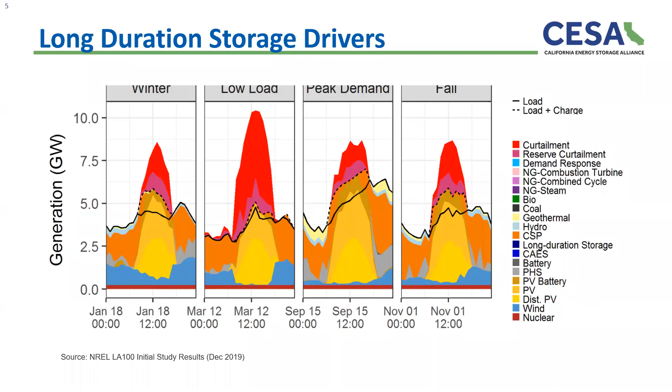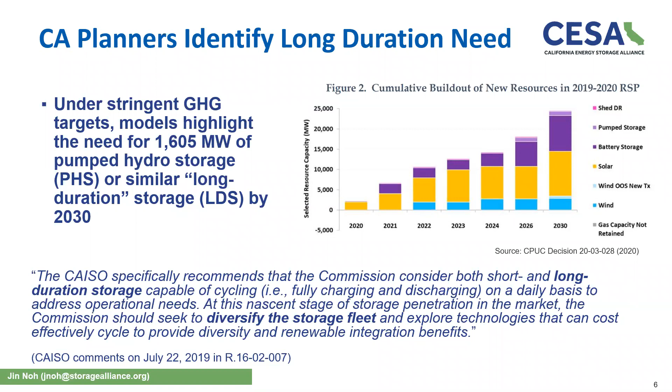We're going to advance further to identify specific technologies and characteristics of different long duration technologies that could better be reflected in these models, given long duration storage is a broad asset subclass of the storage industry. Long duration storage is really entering the conversation of the ISO and grid planners, who have explicitly stated in public comments that they recognize the storage industry needs to evolve, transform, and diversify the storage fleet to better achieve our long-term decarbonization objectives. Malta is one of those leading companies pioneering a long duration technology, so I'm happy to kick it off to Ty.

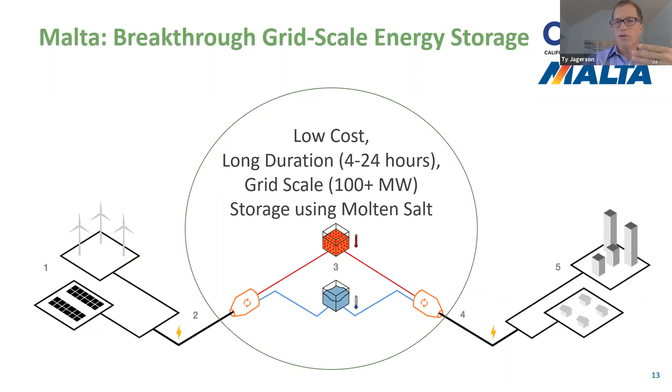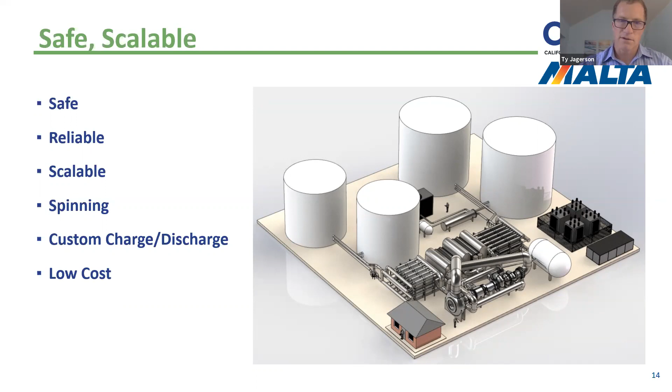Our plant looks a lot like a thermal plant. It looks a lot like a gas peaker plant. And a lot of the technology we use is familiar to people that operate conventional power plants. There's a couple reasons this is relevant. One is because the technology was designed to take advantage of mature, established technologies. And when we talk about coal a little bit later, we'll talk about how that actually gives us a nice way to support the transition of an ailing industry, and it plays into our market engagement. But the technology is designed to be safe, scalable, reliable, able to be designed in a custom way for different geographies and to be operated in creative ways that we think reflects the requirements of the grid coming forward. And of course, it has to be low cost and deliver good returns for investors.

Malta is a spin out from Google X, and that continues to be a really important relationship for us, both for on the energy consumption side and as a data friend. We also have Alfa Laval, the world's largest heat exchanger company in the world, as a participant in the company, and Breakthrough Energy Ventures, and other strong partners, including Concord New Energy, which is an energy developer, and Turbo Machinery Partners. So we are designed to scale. We're engaged in the market, and we have partners that are investing a lot alongside us into getting this capacity into the ground.

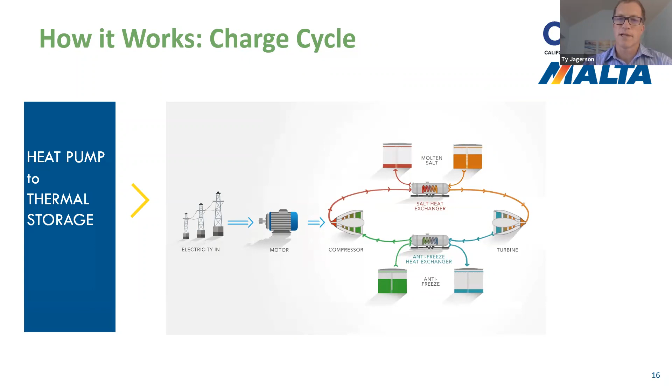I won't take too long on this. Basically, we take energy from the grid, we run it through turbo machinery, put it in tanks, and regenerate it again.

So there's a handful of dynamics that are driving the expansion of the storage industry and the emergence of this long duration energy storage component of that industry. And the first one is the accelerating renewables penetration, more wind, more solar. We'll talk about why that's happening and our perspective on why people generally don't think it's happening as fast as it is happening. Second thing is climate concerns. We all have this, and it impacts the policy, and it impacts people's daily decisions, and obviously it drives a lot of the stuff we're talking about here. Something a lot of people are unfamiliar with is just economic growth and electrification themselves are drivers of storage and long duration energy storage requirements.

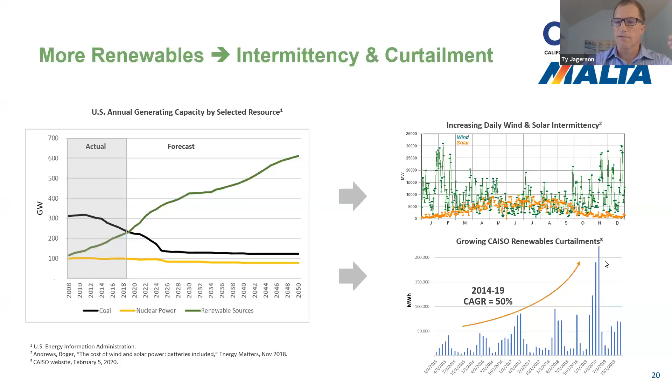The other thing that's really interesting is an example from the California energy market, the CAISO market - curtailment is going up. Curtailment is just a fancy word for throwing away useless renewable energy that you can't use at the time it's generated. This is a recent chart that illustrates how much curtailment there is, and it's very much an exponential line. You're going to see increasing amounts of this, not just in California, but in all parts of the world. If you look at this illustration for CAISO and the renewable energy penetration levels that are anticipated, you see a very steep increase in the anticipated penetration percentage of renewables.

But here's the challenge: the amount of renewable energy storage you need, as your overall contribution goes up, increases non-linearly. So this type of increase has to be met by a greater increase in amount of renewables storage, because you need to be able to cover more and more different scenarios for volatile situations.

One of the things people often say when we're talking to them in the market is, I totally get that we're going to need long duration storage at some point, but it kind of seems like it's not really there yet - shouldn't we just wait? This is an interesting analysis done by NREL for a bunch of different energy markets and specific locations in the US.

Their assertion is that the blue line is the amount of 4-hour storage that's needed, the orange is 6-hour storage, and the green is 8-hour storage. That's what's needed now and for current planning cycles. The critical thing here is that you don't see a lot of 8-hour, 10-hour, 12, 20-hour storage out there, because those technologies really aren't available yet.

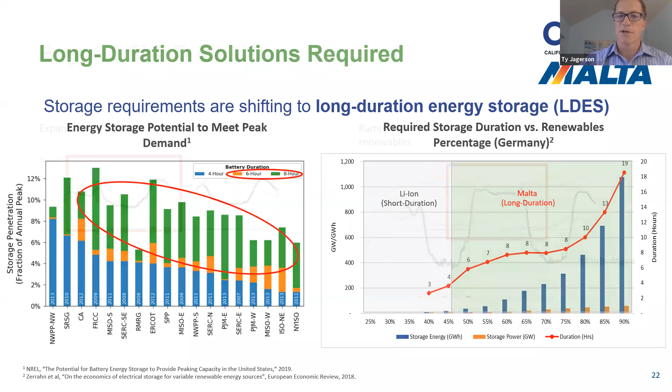So lithium is a great solution for dealing with the immediate problem of the duck curve, where you can take some of this energy from the middle of the day and shift it towards the end of the day, and then you sort of flatten the duck curve.

And we think lithium is a great solution for that. As you get more and more lithium on the table in the grid, it flattens out a little bit, but then you have the challenge: how do you extend that renewable energy to supply all through the day, into the next day, and eventually into subsequent days?

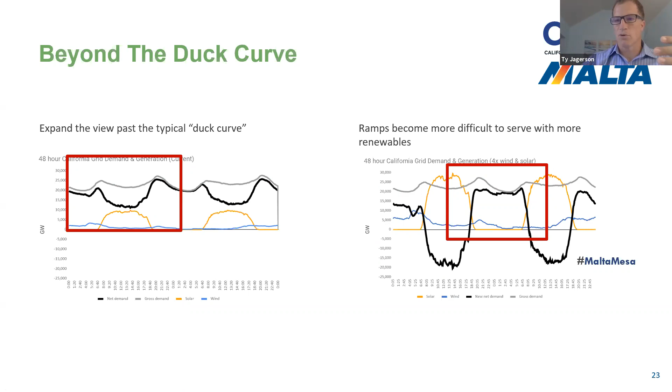That's really the initial applications we're going for. We're not only looking at shifting it from the middle of the day to the end of the day, but shifting it all the way through the end of the evening. Because we have this flexible charge and discharge ratio, we can pull down extra amounts of really cheap energy in the middle of the day and then spread that out over longer periods of time to help make the total grid much more flexible and resilient in the face of enormous amounts of renewables.

There's a lot of complicated ways to look at this, but one simple illustration is: if you can spend more time charging and get a longer charge cycle, that gives you a lot of flexibility for how you dispatch. You can do that on the charge cycle or the discharge cycle. We'll talk a little more about the revenue models associated with this.

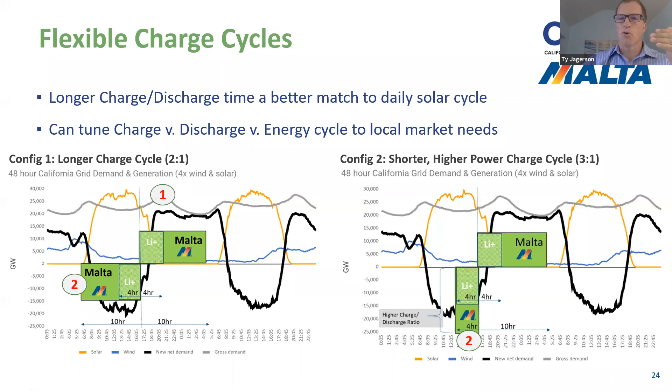There are really a couple different time scales that are relevant. You've got the duck curve alleviation, and then you've got moving into a 2-day regime where you can extend into a full 24-hour cycle. And then increasingly what people need to be able to do is run their grids without any carbon supply for multiple days.

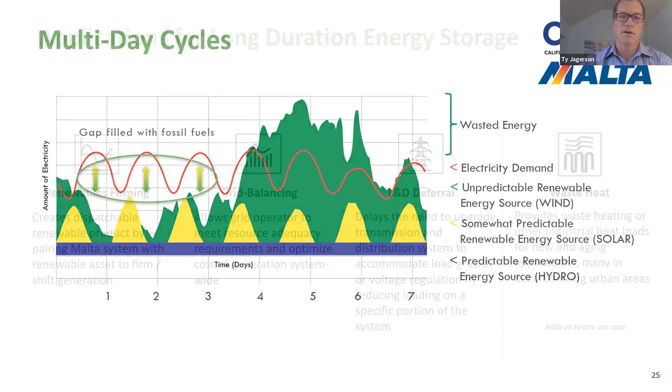So this is really where, for these initial applications we're talking about, and then as you get into multiple weeks and into months, you start moving into the domain of seasonal storage, which is not really what we're going after. Although if you had a 96-hour long duration energy solution, that might help you combine your resources to get to a seasonal solution. But there are other interesting developments out there, like hydrogen might be a good seasonal solution. And again, all these things complement each other as part of a future grid ecosystem.

There's a lot of different ways to look at the value of a regular storage system or a long duration storage system. The simplest way to think of it is in terms of renewables firming, balancing out your renewables, grid balancing, which is accommodating for all the different chaotic elements on the grid and stabilizing it, and then T&D deferral, which means instead of spending a billion dollars on a new transmission line as you get new loads and new solar, you can use storage at either end of the potential transmission or distribution line and just buffer your energy that way.

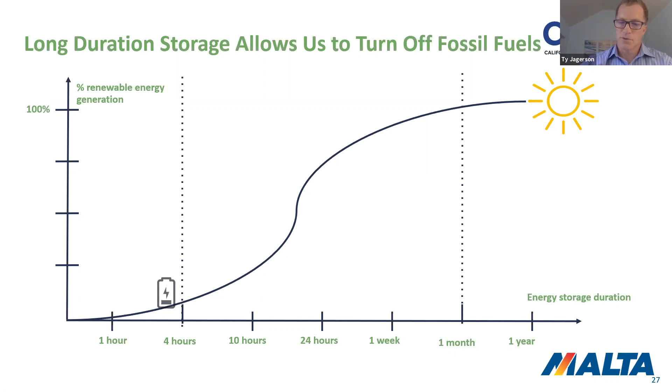In our case, we also generate waste heat, and we have a thermal supply in our system, so we can also go after waste heat applications. But again, the key thing that all these applications are really enabling at the high level is being able to get to a point where we can turn off fossil fuels altogether and get to a truly 100% renewable energy solution.

So this is sort of a standard 'mandatory required market is growing aggressively in all markets around the world' slide. And it's useful, but something that's always fascinating to me is when you look at these slides, they always start with some sort of exponential curve, and then when you look out into the future, they project out linearly. For a number of reasons, I think a lot of the models out there are

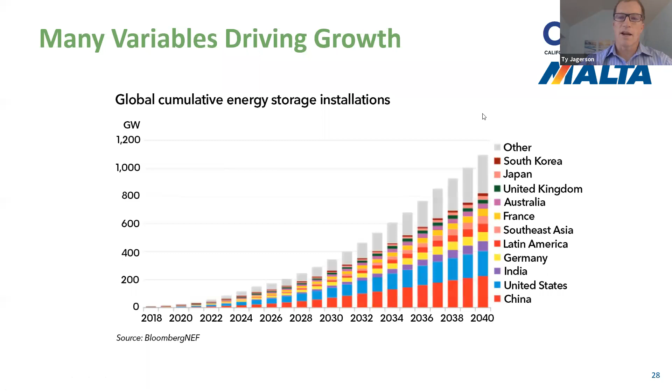wrong and overly conservative. So I'm going to pause here and take a couple of questions.

So first question: did Mr. Jagerson cut his own hair? That's very funny, anonymous. I did, I cut it initially. My wife helped me finish the job.

Gravity versus thermal, locationally and application-wise: I think there are potentially applications for gravity types of storage solutions. Pumped hydro is a gravity storage system. And I think there's sort of a Cambrian explosion of new technologies out there. I think for gravity, it's hard to beat water, but there are a bunch of creative things going on with pressurized water and everything else.

Is thermal more scalable down to distribution level for microgrids? One of the advantages of our technology is that the bigger it goes, the more economic it gets. So we've migrated our core product to a 100 megawatt solution, because turbo machinery has demonstrated that it's the most reliable, lowest cost, large scale way to generate power. So we think the 100 megawatt domain is the most interesting. We are looking at some thermal applications and some niche applications down in the 10 megawatt range, so yes, especially when you're combining the power with the thermal loads, it's very interesting.

There are political organizations out there that are looking ahead and saying, we need this, we need it now. If you dig into the weeds around a lot of the regulatory bodies who are saying our 4-hour RA requirements or our capacity requirements, market mechanisms are inadequate for the coming boom in renewables, and inadequate for the political commitments being made, or the corporate commitments being made about 100% renewables.

And so these changes are in the works today. And 3 years from now, 4 years from now, certainly 5 years from now, when we turn on our first system, the regulatory mechanisms through which storage projects are compensated today will be very different. And you can start to see where these are going when you dig into some of the regulatory dialogue.

California, again, definitely a leader in this space, as it's always been. Where goes California probably will go the rest of the world eventually. And they are investing heavily into this and looking at a lot of the benefits.

I want to talk for a quick second about hybrid solutions. People have talked about hybrid energy solutions for a long time, and for a while it was sort of solar and wind combined together, or solar and wind plus lithium. But increasingly, you're going to see hybrid solutions that include long-duration energy storage. And that's not just solar and wind with long-duration storage, but solar and wind with lithium with long-duration energy storage.

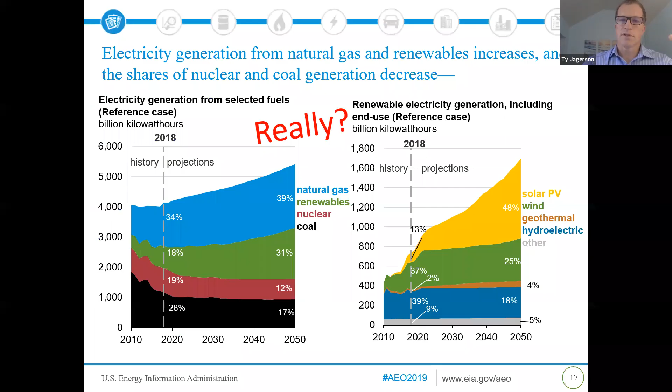And the reason for that is because I'm going to zip way back up here. If you look at this curve, in any given multi-day period, you're going to have a need for either long or short period storage. But as these durations get longer and you need to optimize the economics of your assets, and you do more and more of this oversupply, you're going to need a combination of different resources in order to economically address these requirements.

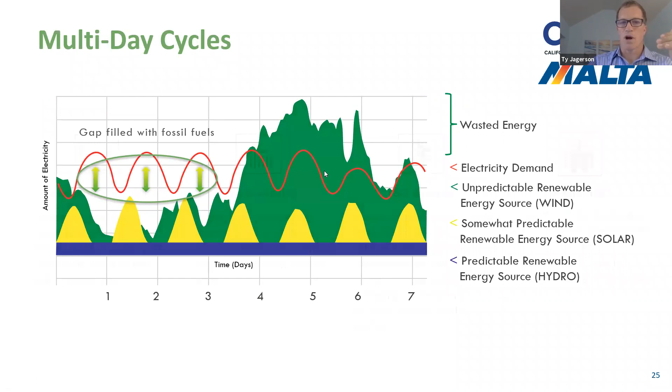And I think ultimately what you'll also see is not just wind and solar and lithium and long duration storage, but you're also going to see seasonal storage injected in there as well.

And I think one of the most interesting candidates for that is hydrogen. Today you'd say, well, why would you bother with a short duration storage if you can use a long duration storage? The problem with that is that the energy conversion efficiency of hydrogen storage, where you're using solar to split water to create hydrogen gas, which you can then burn or put into a gas pipeline, the efficiency is too low.

And so you really only want to use that when your more efficient lithium and/or long duration storage solutions are sort of capped out on their storage, which is going to happen in markets where you've got super low cost wind and solar.

If you talk to a renewable energy finance entity right now, what they'll tell you is it's really difficult to get a good solid financial yield on wind and solar projects today, because the costs are coming down so far and because there's so much competition.

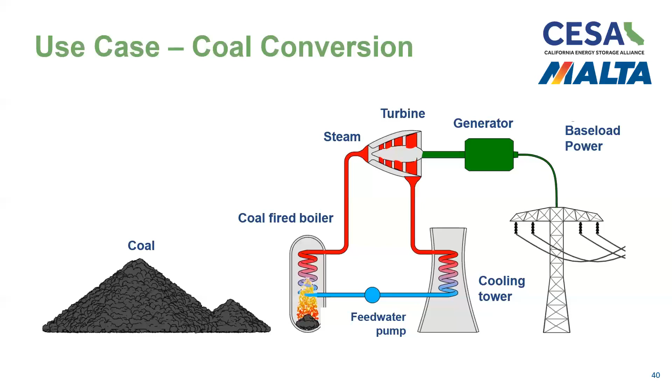That's really important because you have many, many gigawatts that are retired and many more coming down the line. Ultimately, these coal plants are thermal plants, and what we operate is thermal plants. So we can use the labor, we can use some of the facilities, we can use the brownfields, and there are other things we can do to help streamline that process and reduce the resistance to the transition away from coal.

So a lot of people are asking, well, what's happening with COVID? Energy prices are coming down. What happens? I think there's a couple things. First of all, bottom line is I don't think it really changes that much for when we are hitting the market with our first installation, which is in 2025.

But it is in a way accelerating the trend line that is going to be dominant in the future, which is that coal and gas companies are taking a big hit now because they have marginal energy costs, and renewables do not have that. So a lot of coal plants and gas peakers are being shut down, really hurting the economics and stifling the flow of new capital to these assets. That in turn generates a boost for the folks that have invested into renewables, who are seeing their assets not crater.

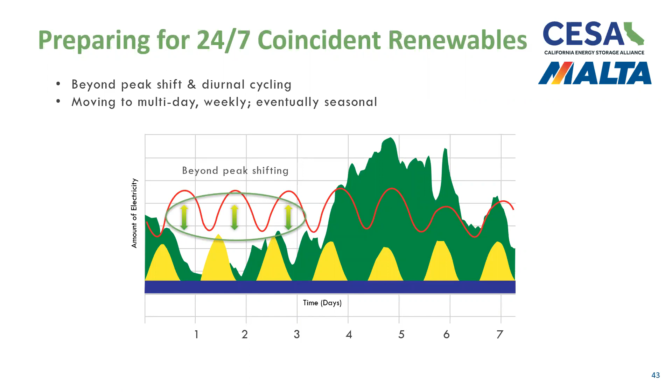Something else that's really important is if you scan the news and look at how governments around the world are looking at the post-COVID recovery period, there have been some really interesting proclamations from Europe, from New York and other US states, and other countries in Asia, that a lot of the trillions of dollars of reinvestment and government funding is going to come in the form of climate change related investments. That means renewables, but in a lot of these places, one of the biggest barriers to getting more renewables is having long duration energy storage. So it's a really interesting point in time, and we think it doesn't create a novel landscape, but it accelerates the future.

So as we look forward to figuring out what's going to happen in 24/7 renewables, the question is, well, what are the monetization mechanisms for this? I'll start with a bit of an eye chart here. As we mentioned, there are different ways to describe how you can monetize storage, and for the most part, most of the things you do with regular storage are the same things you do with long duration energy storage.

Different long duration energy storage solutions have different technology attributes. Because we have spinning turbines, we actually can take advantage and sell the spinning inertia of our facilities, so that's nice. But if you look at these different bundles of types of things people can do to monetize, each of these categories breaks down into more specific types of revenue source.

If you look at commercial storage contracts, you'll see we will pay you X dollars for this amount of capacity, or for this amount of capacity, or for this amount of capacity. One of the reasons I like this chart so much is because each of these boxes is a different market - so PJM, SPP, and ERCOT.

If you look at the dots here, this shows that in storage projects in each of these areas, utility scale storage projects are capturing these types of values at a valuation reflected on the y-axis. Where people are getting paid for the capacity value of their storage, the amount varies wildly - this guy is getting paid $10 per kilowatt year for their solution, this guy is getting paid 200. If you go through the chart, it's really all over the map, with different places valuing these in highly variable ways.

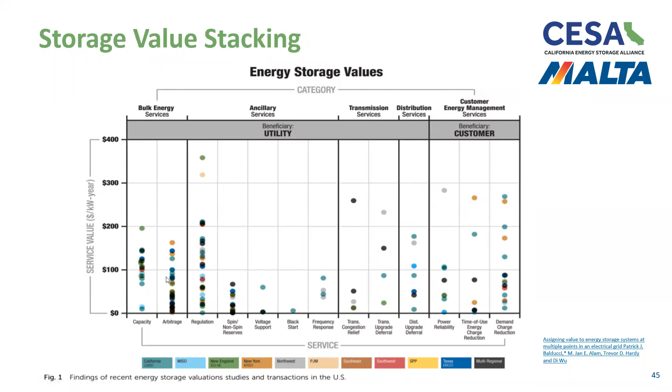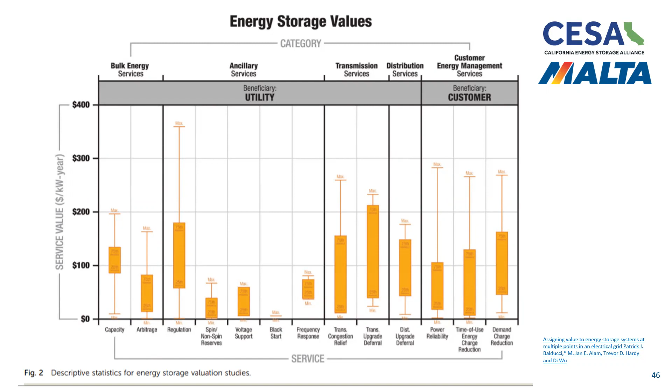This is basically the same chart, but cleaned up a bit. My favorite part of this whole chart is energy arbitrage - that just means buying energy when it's cheap and selling it by discharging your system when energy is expensive. 90% of the time when you talk to people about storage, that's what they assume the value is, and most of the time we spend with customers is talking about when we're going to buy and when we're going to sell. That's one part of the economic analysis, but what this chart tells you is that arbitrage actually ends up being a minority component of the total value of these battery systems. It's important, it's critical, but there's a much broader range of storage value drivers than just that.

There are a couple of critical things about monetizing coincident renewable energy. One is bundling portfolios of green assets - we've talked about this. We believe that in the last couple of years, people who build solar and wind assets are starting to become storage experts, and those leaders, in order to survive in the future, are going to have to become long duration energy storage experts as well, because people aren't going to want to buy their supply if they can't get it firmed up over a long enough period of time.

We think the rise of long duration storage assets is going to add a new level of complexity around data management, specifically around load forecasting and operating these facilities. That's a software challenge and a very distinct new opportunity in an already nascent but increasingly crowded load forecasting product market.

You're starting to see a proliferation of complexity around contracts, specifically contracts with multiple off-takers, and we think that's a trend that's going to be accelerated, especially with long duration storage. There are also going to be some questions - are corporates going to pay a premium for 24/7 renewable energy? I think the answer is maybe, but what's really going to happen is that non-24/7 options are going to be increasingly precluded from bidding access to these projects. Then you just have a more complicated data environment.

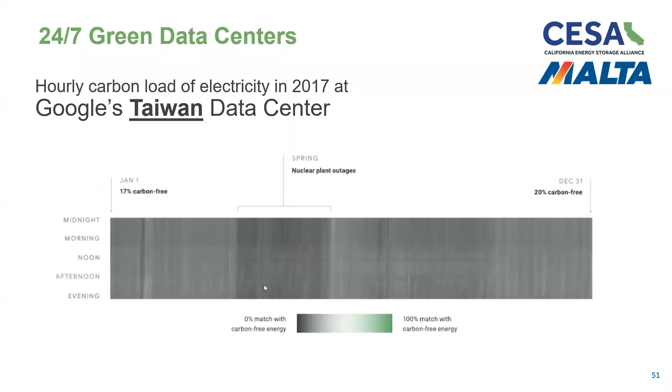This is the same chart for North Carolina, and as you can see, it's much harder in this place because they don't have good enough storage. This is the chart for Taiwan, and you can tell there's a long way to go. And when you average this out across the entire global Google data ecosystem, you can see there's quite a long way to go.

Other corporate entities are hopping on the bandwagon, and that's a very good thing. Microsoft and Vattenfall recently announced that they are actually delivering a 24/7 solution. They're doing that because Vattenfall has enormous amounts of hydro, and Microsoft has great cloud analytics, so they're combining those two things to deliver this.

It's possible to do that in a Northern European environment where you have unfathomable amounts of wind and storage. As the system expands, it gets harder and harder to do it with more and more folks participating. Daimler is one of the corporations that's also jumping into the mix, and you're going to start to see more and more of these contracts. Remember, as you scale, you need more and more long duration storage, and you're going to see more and more innovation on the contracting and financing side.

The models are absolutely critical in this process. A big shout out to CESA, which has a long duration energy storage modeling effort going on, specifically to support California. There's a bunch of other really exciting modeling things going on, and there's a huge opportunity in this space. Just a few days ago, Tesla announced they are making public their modeling tools used for grid modeling, which is very smart.

University of California, Merced just won a grant from the California Energy Commission to develop the Resolve model at higher resolution. It turns out that the models California uses can't accurately predict the operation of storage facilities beyond the standard lithium situation, so CEC is working to improve that. There are some other really interesting government, federal and state initiatives to support this data problem, and companies like Siemens, AutoGrid, and Sunrun are all tackling this new grid storage ecosystem and the data challenges associated with it.